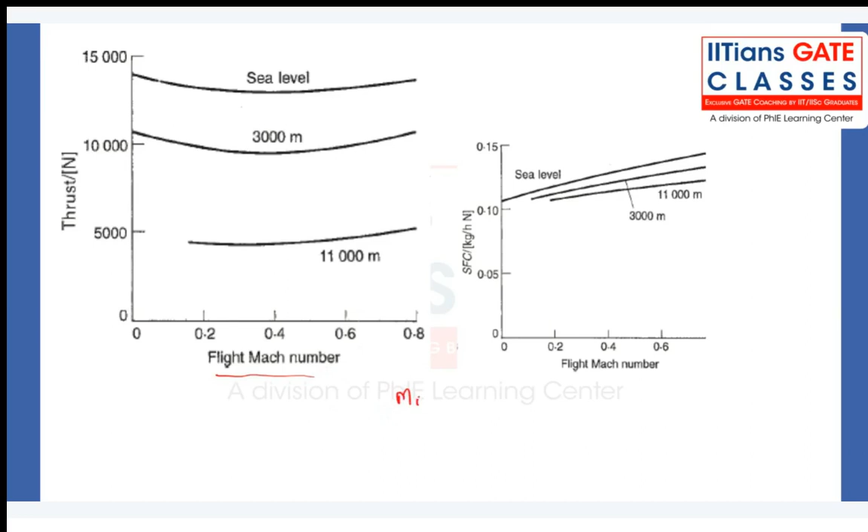The first question is how thrust actually varies with flight Mach number. Here, only the flight Mach number is given as a function, not the forward speed. The forward speed - how you define the Mach number at the inlet - is the forward speed of the aircraft divided by the speed of sound, local speed of sound, say gamma R Ti.

Taking gamma and R to be constant for air, as a calorically perfect gas within the troposphere altitude - we know the turbojet operates only within the troposphere, so that's safe to assume. So Ci is constant as per this problem statement, but how does temperature vary in the troposphere?

When you go from sea level to a higher altitude, how does temperature vary? It decreases, right? So Ti decreases as altitude increases. That makes the Mach number increase, right? If Ti is decreasing, that means Mach number is going to increase.

So that is the first outcome you get. How does Mach number vary? It increases. So now you see, as Mach number increases at any given altitude, how does the thrust vary? It almost decreases first and then increases, for a given altitude.

It's not for varying altitude, but the question is specific - for a given flight speed with increase in altitude. So we are not interested in a given altitude. For a given altitude, you could say the specific thrust first decreases then increases - that is true, but it's not for a given altitude, it is for different altitudes.

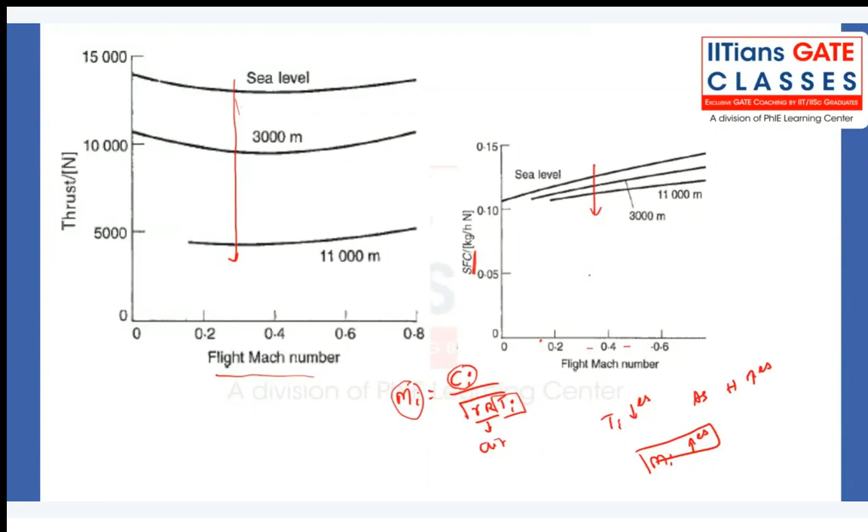So what we are going to do is define specific thrust. Specific fuel consumption can be defined as mass flow rate of fuel supplied to the thrust developed by the engine. We are again making one more assumption that thrust is optimum, so we are not having over-expansion or under-expansion. Given that the turbojet works only with a converging nozzle, we assume we are not going beyond optimum expansion, so the pressure thrust contribution is zero. That makes our life easier to comment on this problem.

Okay, so now this can be easily shown as fuel to air ratio divided by, sorry, this is SFC, specific fuel consumption, as is defined. So SFC can be written as F divided by Fs, where Fs is specific thrust.

So now, we are again assuming the mass flow rate of the fuel is not going to change, it is constant. But we know the thrust is actually going to decrease as we move with altitude.

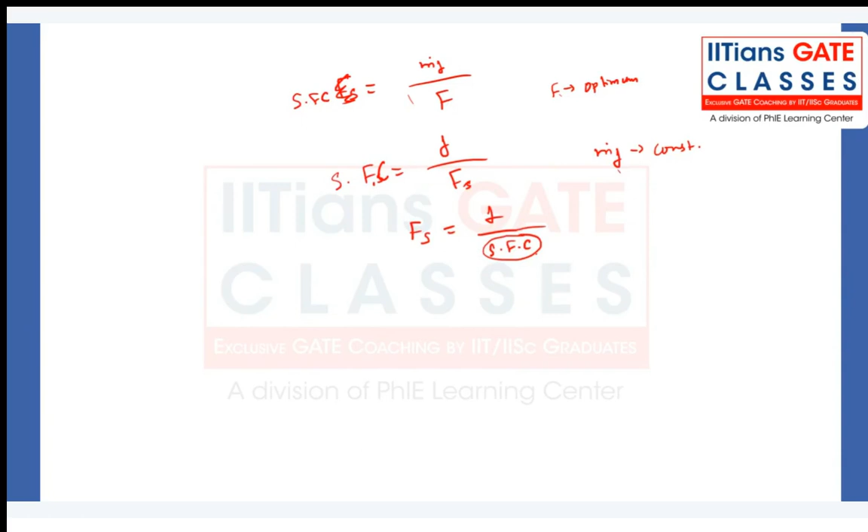But what about F? F is defined as mass flow rate of the fuel to mass flow rate of the air. We are assuming we are not changing the mass flow rate of fuel to the engine, so we take it to be constant. So now we have to look at the variable mass flow rate of air. How do we define the mass flow rate of air?

That is density, incoming air velocity Ci, or the forward speed, and the inlet area. We can calculate mass flow rate in this manner. In the problem it is given that it is constant, and also that it's the same turbojet engine, so I can safely take the inlet area to be constant. So the only parameter which varies is density.

As we move to higher altitude, how does the density change? Density decreases, right, as altitude increases. So if density is decreasing and the other two parameters are constant, then the mass flow rate of air is going to decrease as we move to higher altitude.

So if the mass flow rate of air is decreasing, that means the fuel to air ratio is increasing. So if fuel to air ratio is increasing and SFC is decreasing, what happens to specific thrust now? The net result is Fs is going to increase monotonically, right?

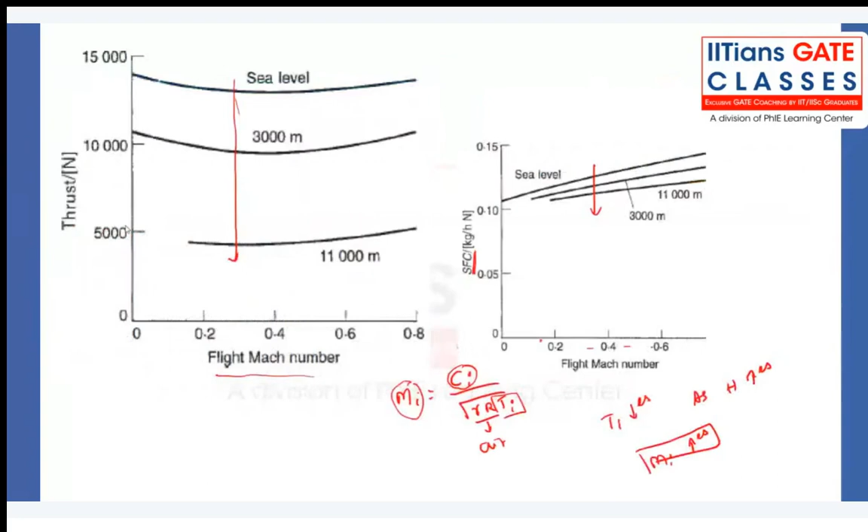Yeah, SFC is correct, right? It's mass flow rate of fuel to the thrust produced by the engine. I want to stress here, this is not defined for a unit thrust. Don't take this definition as being for unit thrust. No, it's the amount of fuel you are supplying to the amount of thrust you have produced, that's how you define it. It is not defined for a unit thrust, it is defined for the actual thrust and actual fuel you supply. So this has to be cleared, don't take that wrong message. It's not defined for unit thrust.

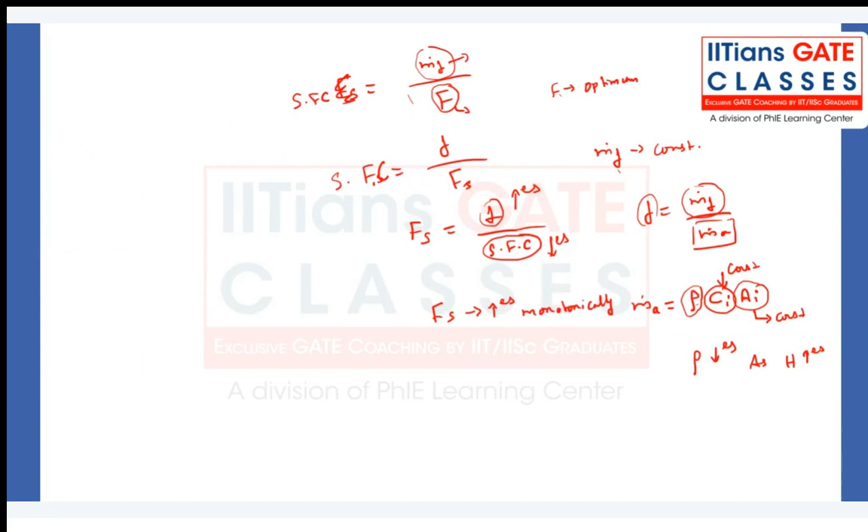No, okay, so then we will move on to the next question. Again, this is based on the optimization graph, so they really tested your understanding of the topic of optimization. We will see how the propulsion efficiency of a turbofan engine operating at a given Mach number and a given altitude changes with increase in compressor pressure ratio. It's a very beautiful question.

See, the major keyword we have to look here, what they are actually asking: the propulsive efficiency of a turbofan engine, operating at a given Mach number and a given altitude, change with increase in compressor pressure ratio. So if I increase the compressor pressure ratio, how does it change? There are 1, 2, 3, 4, 5 keywords. So as soon as you see this kind of question, you have to identify the keywords.

I'm taking an alternative route to answer this one. Though I could have taken the turbofan engine, the definition of propulsive efficiency becomes much more complicated for turbofan. So I'm reducing my problem definition from turbofan to turbojet. They both work in a similar fashion, and though the propulsive efficiency definition changes for turbofan engine, it's still a jet combined with a fan. I'm taking the turbojet engine because I want to see how the core engine part works with the given condition. If I can comment on that, then the bypass part can be easily taken - it mainly depends on the turbojet performance overall. So we will see it in that way.

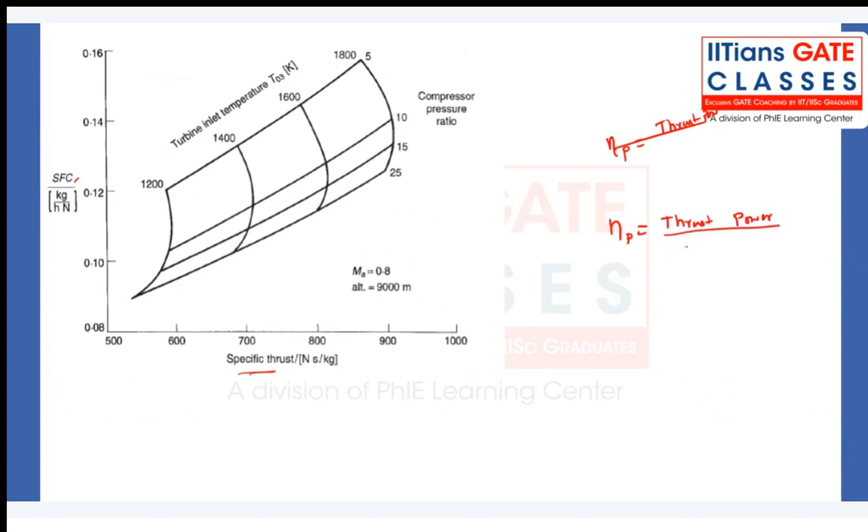Let me write it clearly. It is thrust power divided by the kinetic energy of the engine output. So I can write half m dot a, cj square minus ci square. Remember I am defining this for a turbojet engine, but we can still comment on this particular question with this approach.

Now the interesting part is, what is thrust power? Thrust power is nothing but thrust times the forward speed, divided by half m dot a, cj square minus ci square. So what is F divided by m dot a? That is nothing but specific thrust. So we get 2 times specific thrust times ci, divided by cj square minus ci square. So this is my propulsive efficiency. Let us keep this relation aside - we will come back to it later.

Now if you look at this graph, how does specific thrust vary? That's what we're going to address first. What are the constraints given in the question? They say operating at a given Mach number - they are fixing the Mach number and the altitude. So those two variables are fixed, and this graph is for a given Mach number and given altitude. So we've taken care of that part first - we are fixing the Mach number and flight altitude.

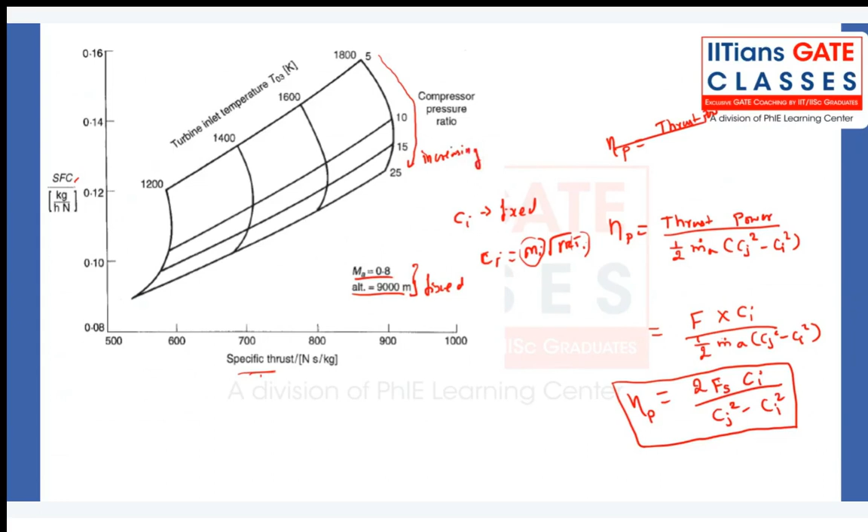Now, what they're asking - if I change the compressor pressure ratio - this is how the compressor pressure ratio is increasing, see it is increasing. But now look at this graph - it's not just the compressor pressure ratio as one of the variables, or the only variable. There are other variables too.

There is a turbine inlet temperature, there is a specific fuel consumption. No statement is given about these two variables - they are not specified whether fixed or changing. If I make an assumption that my specific fuel consumption doesn't vary, then I can draw a constant line.

So how does specific thrust vary now? See this point, this point, this point, and this point. So now clearly my compressor pressure ratio is increasing on a constant SFC line, and as it increases you will conclude that specific thrust is also increasing. But that is a wrong conclusion, because it is not given that SFC is constant. So I cannot make a statement just by using that.

And if you take turbine inlet temperature as fixed, then again you will see that my specific thrust is going to increase first and then decrease. So in that sense it also doesn't make sense, because this constraint is not given to you - you cannot assume turbine inlet temperature is constant. All you have to do is see how these variables actually vary. So first we will look at the specific fuel consumption, which can be defined as F divided by Fs.

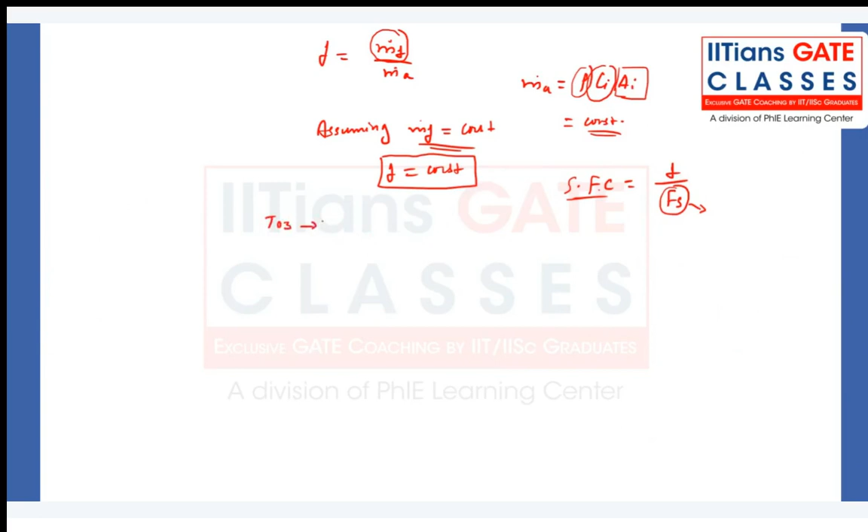So now we see how turbine inlet temperature T03 varies. This question we will address. So we addressed for F, now I am going to address for T03. How does it vary? If you remember our discussion on polytropic process, we can assume this compression process to be some kind of polytropic process. So say I have a given pressure ratio across the compressor.

So I can write for a change in temperature across the compressor as the pressure ratio to the power of gamma minus 1 divided by gamma, times eta infinity C. So again I am making one more assumption that the polytropic efficiency of the compression is constant for all pressure ratios whatever we are going to investigate. So this is another assumption I am actually making.

Keeping that in mind, if pressure ratio is increasing as per the given statement, T01 is not going to change because atmospheric condition is not going to change and I am not changing the inlet either. Ci is also not changing, so it is not going to change. So now how exactly does T02 vary? If pressure ratio increases in a compressor, what happens to T02? T02 increases, right, as pressure ratio of the compressor increases.

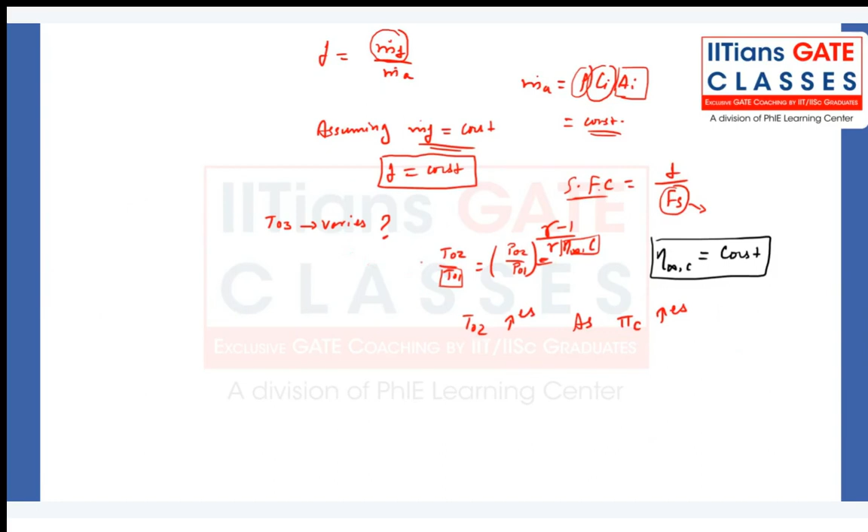So if T02 is increasing, now look at the combustion process. Mass flow rate of the fuel is not changing, and you are not changing the fuel either, the type of fuel. So I can write the energy balance within the combustion chamber. Let's put it like this: energy balance in the combustion chamber, I can write T03 equals T02 plus some terms which come with the mass flow rate of gas and Cp of gas and those terms. That is dividing over here.

And some here again, Cp of air divided by Cp of gas is there. All those terms I am not considering, I am treating them all as constants, they are not changing. So times I can get something like mass flow rate of fuel, or F, in terms of combustion efficiency times, or we will treat it as 100% efficiency, that is fine, QCV, right? So this part is not going to change, right? This we can treat as not a variable quantity for a given problem.

So the only thing which changes here is T02, and we saw that T02 increases for increasing pressure ratio. If T02 is increasing, what happens to T03? So it's addition of some constant, so T03 is also increasing, right? As per the given problem statement, T03 increases as compressor pressure ratio increases.

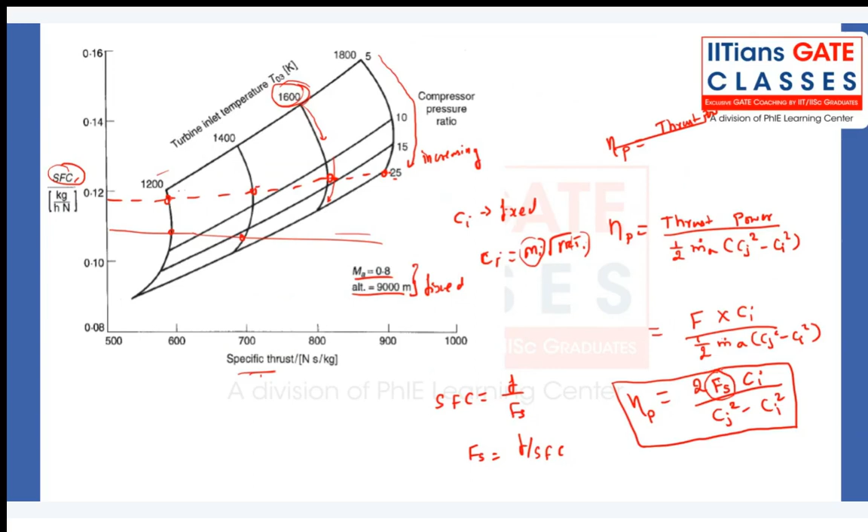So the best answer to this one is it decreases and then increases. So there is one possible answer which says both the options, decreasing and increasing nature. So this can be a better option among the given options. So everybody clear with this?

Yes. So these are very intriguing questions, and it needs a lot of thought process. In a GATE kind of environment, I would suggest keep these questions at the end. Don't try to answer in the first go, because this is a multiple choice question. You have a better probability that you might lose a mark if you haven't thought this question carefully. If you just pick something as a guess, you might lose marks by picking the wrong answer. So you have to think carefully to answer these questions. So keep these questions at the end. Though it's a 1 mark question or something like that, it looks very straightforward by reading the question, but it is not. So these kind of questions are tricky.

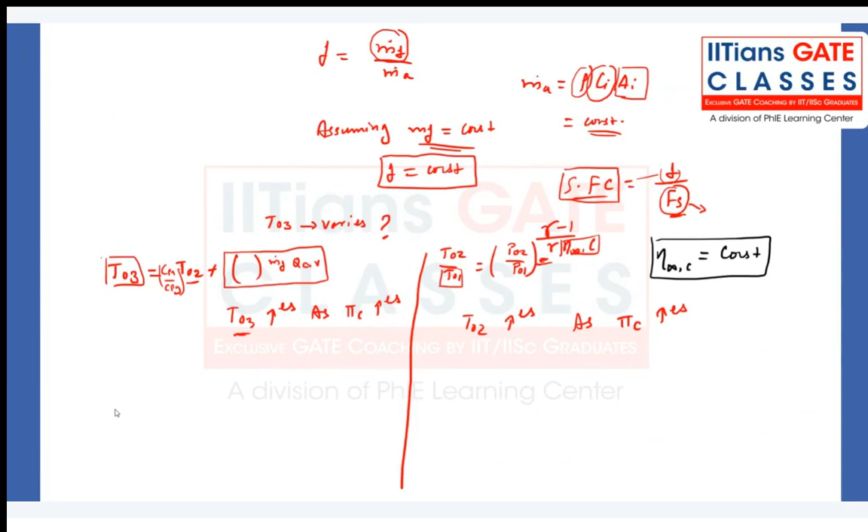The shape of a supersonic diffuser that slows down a supersonic flow to a subsonic flow is - it should be a very straightforward question. So you should have a supersonic diffuser that brings down the supersonic flow at the inlet to a subsonic flow at the outlet. So what should this shape be? It has to be converging and diverging, right? So we have this nice area Mach number relation that guides us, like dA by A is equal to M square minus 1 times du by u for 1D quasi one dimensional flow. So with that, we can comment on what should be the shape for a supersonic diffuser.

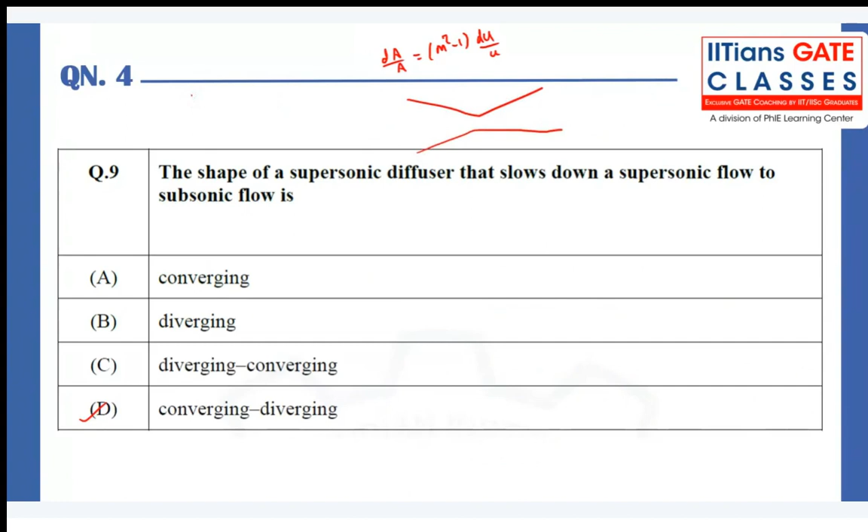And once it reaches the minimum area, we know the flow becomes choked. Then it has to still decrease to a subsonic value. So then you have to have a diverging area. So converging and diverging portion we need. There's a theoretical one. The practical diffusers would look something like this, with some constant area duct, the throat, like this. But in any way, it's a converging, diverging duct.

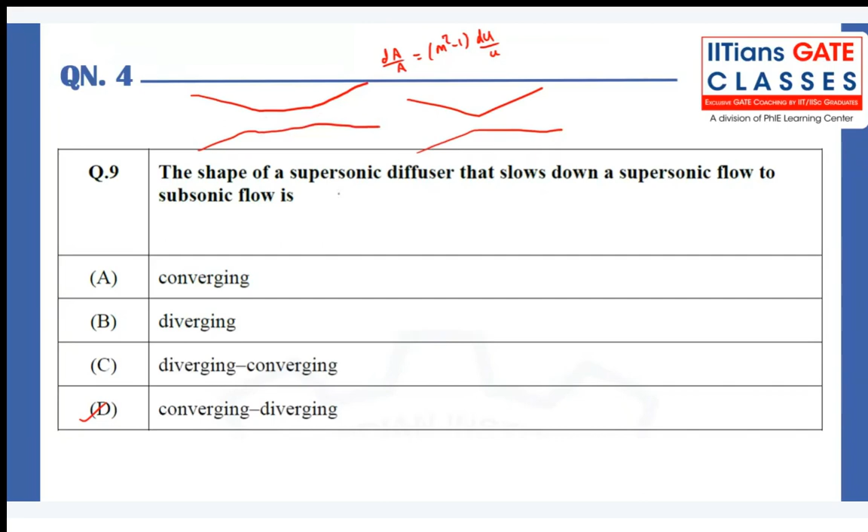Okay, so move to the next question.

An aircraft with a turbojet engine is flying at 270 meters per second. The enthalpy of the incoming air at the intake is 260 kilojoules per kg, and the enthalpy of the exhaust gases at the nozzle exit is 912 kilojoules per kg. The ratio of mass flow rates of the fuel and air is equal to 0.019. The chemical energy or the heating value of the fuel is 44.5 megajoules per kg, and the combustion process is ideal. The total loss of heat from the engine to the ambient is 25 kilojoule per kg of the air. The velocity of the exhaust jet is in meter per second.

So this question is really a beautiful question.

You might feel this is a very complicated question because so much information is given, and it looks like an entire cycle analysis question, because from inlet to outlet, heat addition and heat rejection, so much information is given. But you have to take a brief moment and read the question very carefully.

If you look at this question carefully, you will realize it is nothing but a simple control volume approach. Though it is related to a turbojet engine, you really don't have to dig deep into the individual components. You are not going to analyze the compressor, the turbine, the intake, the nozzle, or even the combustion chamber. You are not going to analyze any of the components of the turbojet engine.

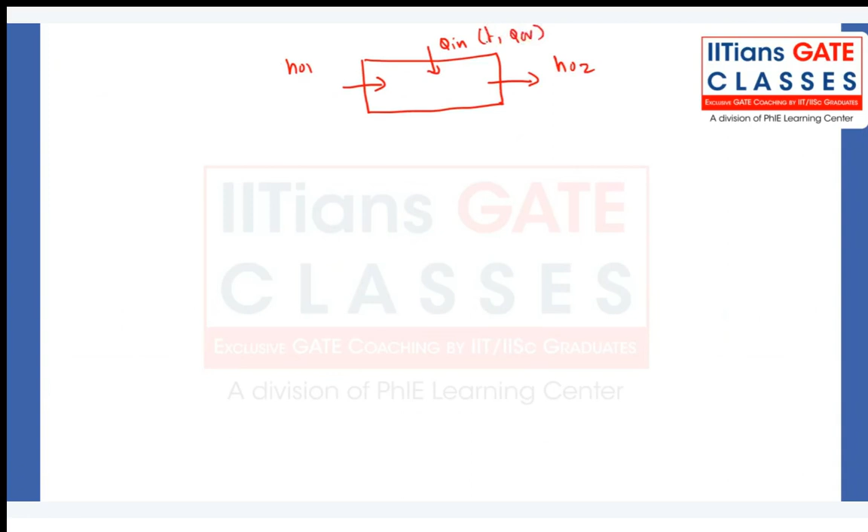So if I draw a simple control volume enclosing the entire turbojet, what do I have? What's coming in, what's going out, that's it. They give the enthalpy at the inlet and the enthalpy at the outlet, the heat addition — from this information you can easily calculate the heat addition. They give F and the calorific value of the fuel, so from here you can calculate Q in, and what is going out of the system, Q out. This simple model is sufficient to answer the question.

Now we will see how we can address this question. The incoming air velocity is also given, so the best approach here is to apply the steady flow energy equation — the first law applied to a flow process. We know that conservation of energy has to be maintained, so what does our first law of thermodynamics tell us?

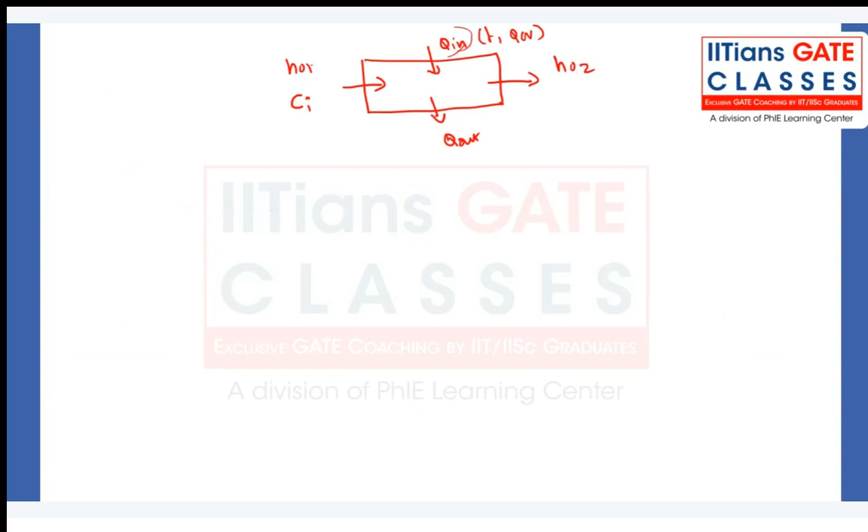If I apply conservation of energy, H1 is given, so you can calculate H01. H2 is also given, and you are asked to calculate the exhaust velocity of the nozzle. So conservation of energy says: delta Q is equal to the change in internal energy of the system plus the external work done.

If I apply that to a flow process, it can be shown that mass flow rate of air times h1, the specific enthalpy, plus mass flow rate of air times the kinetic energy at the inlet, Ci squared divided by 2, plus mass flow rate of the fuel times the heat addition — that is the energy being added in, with combustion efficiency if applicable — minus the heat which is going to be rejected, combine as the total heat change, delta Q, across the system boundary.

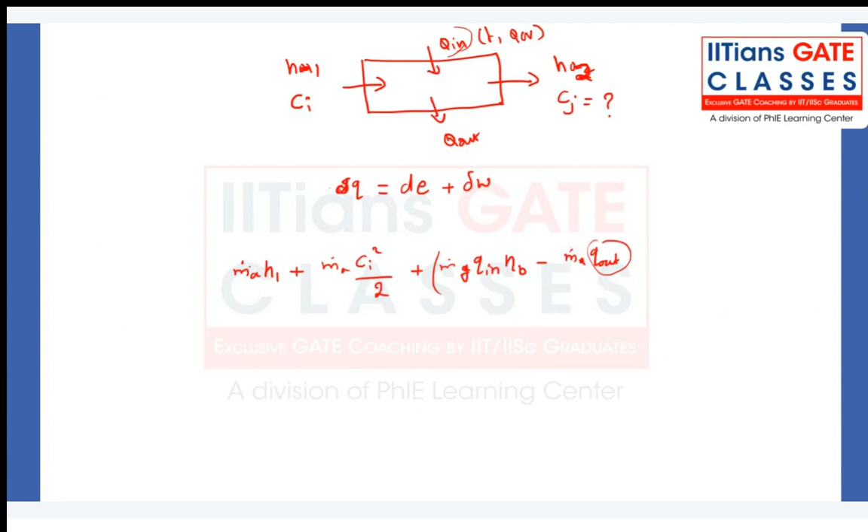So it is the mass flow rate of the air times Q out, because Q out is given in terms of per mass flow rate of air, so I am multiplying the mass flow rate of air to be consistent with the units. This is equal to the right hand side, that is the mass flow rate of the gas.

The moment you add the mass flow rate of fuel, continuity tells you the mass flow rate of gas should equal mass flow rate of air plus mass flow rate of fuel. There is addition of mass to the system, so we have to account for that. It is mass flow rate of gas times H2 plus mass flow rate of gas times Cj square divided by 2.

Plus, if there is some work transfer, any external work transfer. But for the given question, we don't have any external work transfer, so we can neglect this part to be 0. All we have is this part now.

If I take mass flow rate of air common here, it becomes 1 plus mass flow rate of fuel by mass flow rate of air, that is 1 plus F. So I can take mass flow rate of air common from the equation. That makes it 1 plus F times H2 plus Cj square divided by 2, on the right hand side.

The left hand side, again, if I take mass flow rate of air common, this is H1 plus Ci square divided by 2.

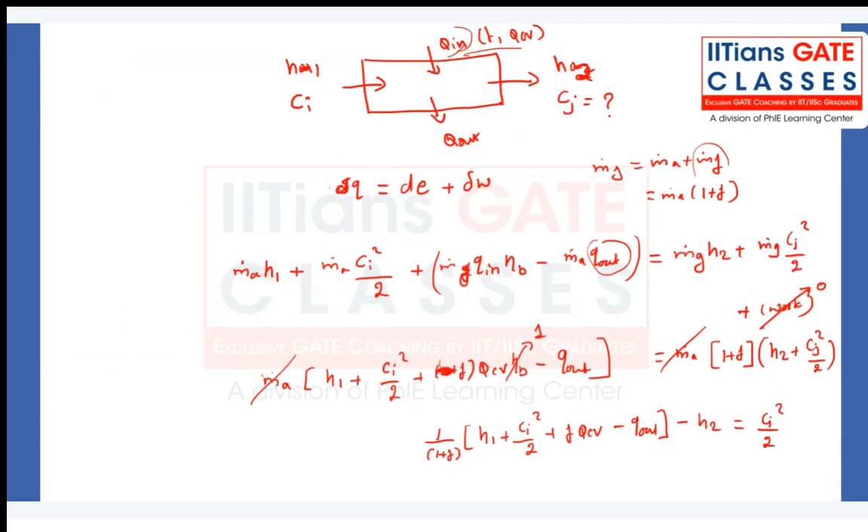Now multiply 2 to this side and take a square root. If you put all the numbers, you should get Cj equal to something around 606.834 meter per second. What is asked in the question, you have to keep it to 2 decimal places and round off. So rounding off to 2 decimal places, it becomes 606.83 meter per second. Clear?

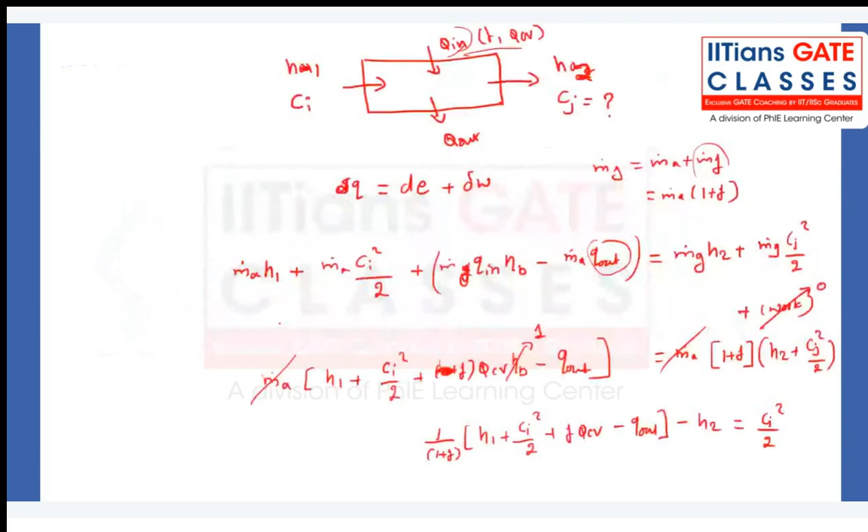Okay, so let us move on to the next question.

A twin spool turbofan engine is operated at sea level with given conditions. PA is equal to 1 bar, TA is 288 Kelvin. The engine has separate cold and hot nozzles. During the static thrust test at sea level, the overall mass flow rate of air through the engine and the cold exhaust temperature are measured to be 100 kg per second and 288 Kelvin respectively. The parameters for the engine are: fan pressure ratio 1.6, overall pressure ratio 20, bypass ratio 3.0, turbine entry temperature 1800 Kelvin. The specific heat at constant pressure Cp is 1005 joules per kg Kelvin, and the ratio of specific heats, gamma, is 1.4 for the air.

Assuming ideal fan and ideal expansion in the nozzle, the sea level static thrust from the cold nozzle is to be found, in kilonewtons, with the answer kept to 2 decimal places by rounding off.

Again, if you look at this question, it looks very lengthy because so much information is given, but you have to take a moment and read the question carefully, and carefully note what is asked. All they are asking is to calculate for the cold nozzle alone, so the moment you have to calculate for the cold nozzle alone, this other information is irrelevant, we don't really have to worry about that.

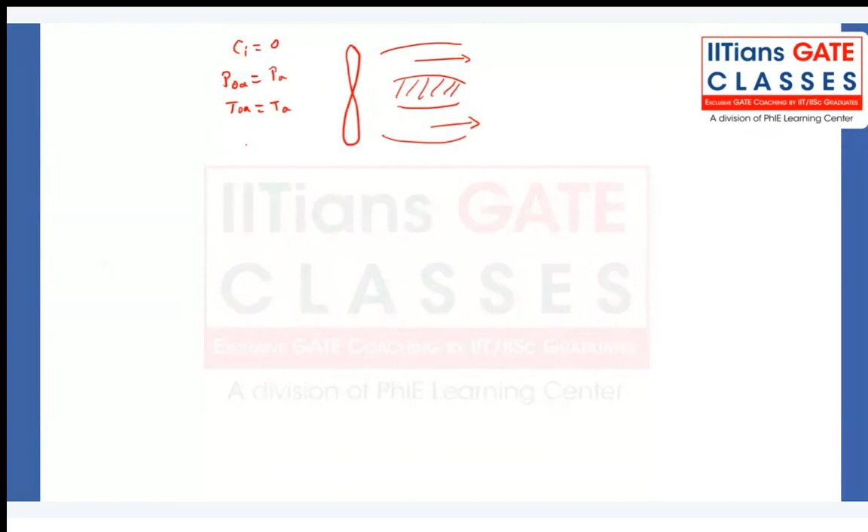So I have information here, PA. See here, my stagnation condition at the inlet is also equal to the static condition because Ci is 0. So I can easily take T naught A equal to TA, and P naught A equal to PA, assuming steady flow. It really doesn't matter because it's a stagnant condition anyhow.

And the mass flow rate of the air is 100 kg per second. From the bypass ratio, I can easily say that the mass flow rate of air can be written as the mass flow rate of air going into the bypass duct, or the cold nozzle, plus the mass flow rate of hot air which is going into the engine.

So from here I can use the definition of beta, the bypass ratio. How do we define bypass ratio? It is the mass flow rate of cold air to the mass flow rate of hot air. Using that, I can show that the mass flow rate of cold air can be written as beta times mass flow rate of air divided by beta plus 1. If you take the mass flow rate of cold air common, it becomes 1 plus 1 divided by beta.

Let me do that step. It becomes 1 plus mass flow rate of hot air by mass flow rate of cold air, that is 1 divided by beta. Keep this on the right hand side, so mass flow rate of cold air equals mass flow rate of air times... if you take it to the other side, it becomes 1 divided by 1 plus 1 by beta. Taking the LCM, it becomes beta plus 1 divided by beta. So beta goes to the other side, and it becomes beta times mass flow rate of air divided by 1 plus beta. That is what we have written here.

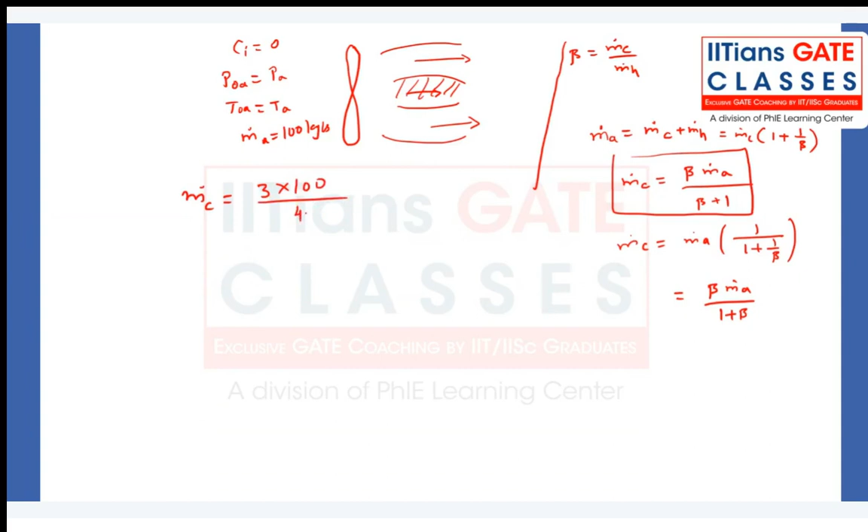So now to calculate P naught 1, if I say this stage is at the atmospheric condition, immediately after the fan this is state 1, and at the nozzle exit I will call it state 3. So now I have to calculate the information to know the thrust, because I have to calculate how the flow is expanding from what pressure to ambient condition.

So for that I want to calculate P naught 1. How can we calculate P naught 1? P naught 1 is nothing but fan pressure ratio times P naught A. Why? Because we don't have to worry about the efficiency of the fan now, since it's given it's working ideally, so I can easily calculate P naught 1 from the given information. So this is 1.6 times P naught A. P naught A is 1 bar. So it is going to be 1.6 bar. That is P naught 1. So this one we calculated.

Once I know P naught 1, how can I calculate T naught 1? T naught 1 can be calculated as T naught A times pi f to the power of gamma minus 1 by gamma, because it's an isentropic process, ideal fan. So T naught A is 288 Kelvin. So 288 times pi f is 1.6, gamma minus 1 that is 0.4 divided by 1.4. So this becomes 329.4 Kelvin. So we calculated T naught 1.

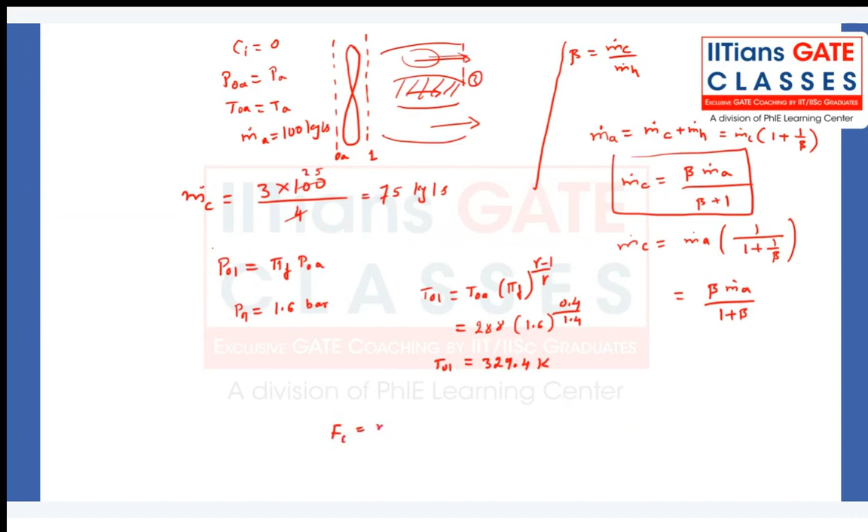So now to calculate the cold thrust, how can we calculate it? Cold thrust is nothing but mass flow rate of the cold air times the velocity at the cold nozzle, Cj, the jet exhaust velocity at the cold nozzle, minus mass flow rate of air times Ci. That we are really not worried about, because Ci itself is 0, so inlet momentum drag is nullified. So the only part we have to calculate is this one. And what assumption are we making? It is optimally expanding. So all we need to calculate now is this quantity, the cold exhaust jet velocity.

So now we will see how we can calculate that. I am again using the energy equation. Since the nozzle is ideal, T naught 1 is equal to T naught at the exit plane. That can be written as Te at the exit plane, plus Cj of the cold air at the exit plane of the nozzle divided by 2Cp. So I am using the energy balance. So from here I can write Cjc equal to square root of 2Cp times T naught E minus Te.

Actually you can directly calculate from here, because T naught E is equal to T naught 1 that you already calculated, and Te is already given in the problem. The nozzle exit plane temperature is given as 288 Kelvin. So you can directly use that, or you can do one more step: taking T naught out common, it becomes 1 minus Pe divided by P naught to the power of gamma minus 1 by gamma. This way also you can approach, since Pe is known. Assuming it is optimally expanding, Pe is equal to Pa. Pa is given in the problem as 1 bar, and P naught you calculated as 1.6 bar. So using either approach, you should get the cold nozzle exhaust velocity as 288.44 meters per second.

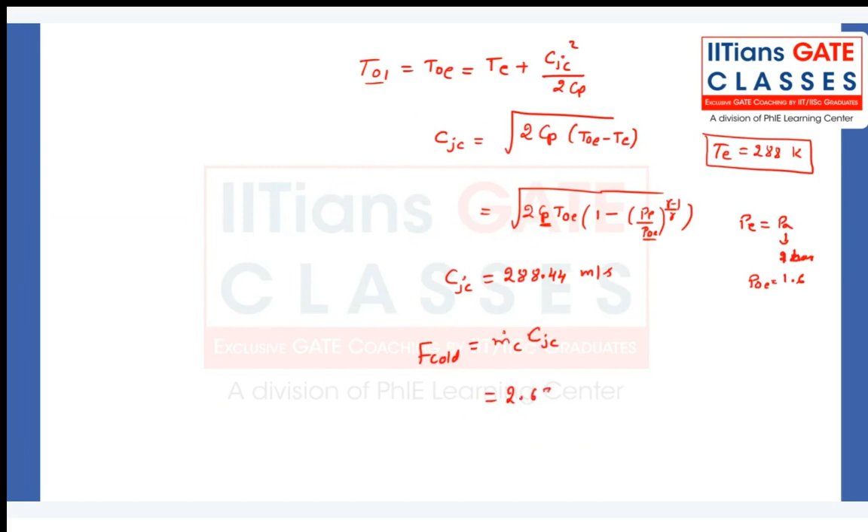Cp is given in the problem, so you can use that. So now you can calculate the cold thrust equal to m dot cold air, or bypass mass flow rate, times the jet exhaust velocity in the cold nozzle. It is going to be 21.633 kilonewton. So look at the question again - round off to 2 decimal places. So just keep 21.63 kilonewton. So clear?

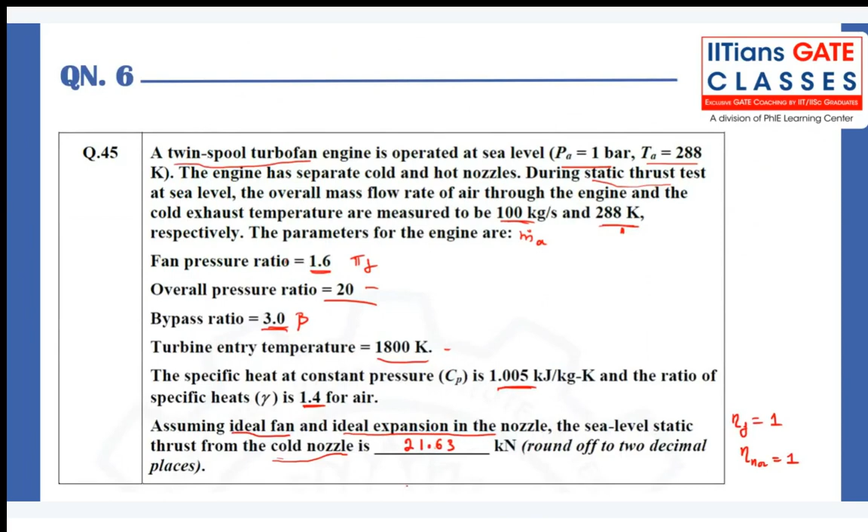Sir, can I go to the next page, sir? Just a minute. Yes. Sir, no, previous ones. Okay.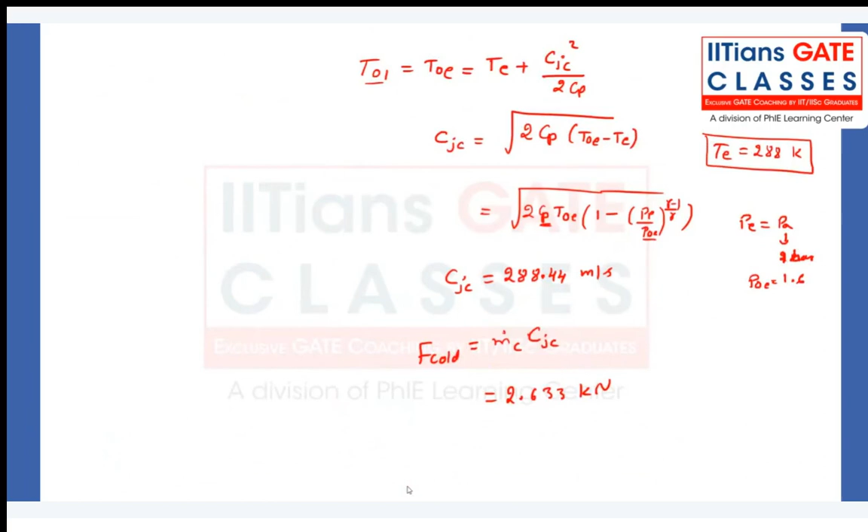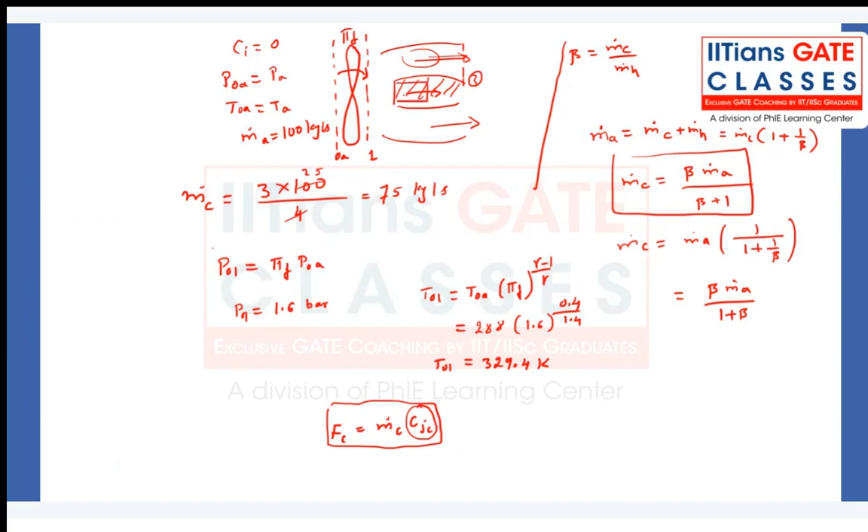Yes, Ashish. If an overall pressure ratio is given and the fan pressure ratio is given, the fan pressure ratio is the pressure rise which happens across the fan. The overall pressure ratio, whatever is given, that is for the compressor stages. You can have multiple stage compressors, so the overall compressor pressure ratio is called the overall pressure ratio, sometimes OPR. That is how they will mention it.

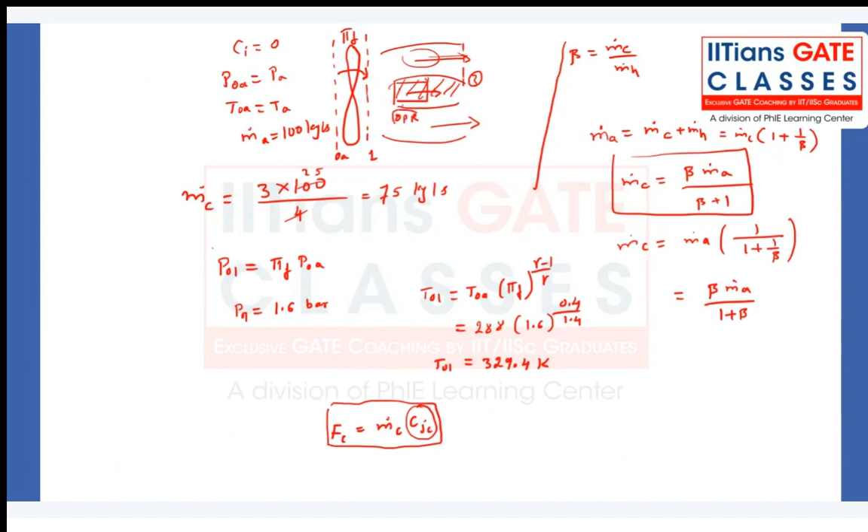So if you want to calculate the work done by the fan, you only have to use the fan pressure ratio, not the overall pressure ratio. If you want to calculate work done by the compressor alone, then you use only the overall pressure ratio, don't include the fan one. If you want to calculate the overall work delivered by the turbine, then you will add both, in case the turbine is running both.

If it is a twin spool configuration as stated in the problem, then you match the work done appropriately. Whichever turbine is running the compressor, you match that part, and the other part of the turbine which is running the fan, you match that one. So that can also be done. You have to do the matching appropriately.

And why do you have to divide the overall pressure ratio by the fan pressure ratio? It has nothing to do with that. Don't confuse it with that.

When you do this dividing of pressure ratios, when you have identical stages of compressors, and the overall pressure ratio is given to you, then to calculate the individual stage pressure ratio you have this idea of dividing them. We discussed this in class: if I have the overall pressure ratio given to me, that is nothing but P naught of the nth stage to P naught of the first stage. So I can write P naught n divided by P naught n minus 1, multiplied with P naught n minus 1 divided by P naught n minus 2, multiplied up to P naught 2 divided by P naught 1, which is the first stage. That's how you can build it up.

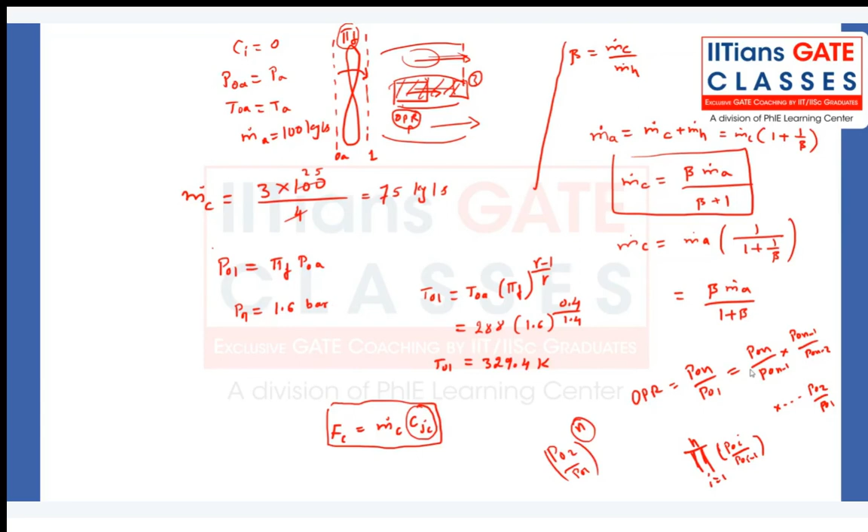Okay, let us move on to the next question.

At the design conditions, the velocity triangles at the mean radius of a single stage axial compressor is such that the blade angle at the rotor exit... Yes, Harini, you raised your hand, do you have any question?

So at the design conditions, the velocity triangle at the mean radius of a single stage axial compressor is such that the blade angle at the rotor exit is equal to 30 degrees. The absolute velocities at the rotor inlet and exit are equal to 140 meter per second and 240 meter per second respectively. The flow velocities relative to the rotor at the inlet and exit of the rotor are equal to 240 meter per second and 140 meter per second respectively. The blade speed u at the mean radius of the rotor is...

Again, the statements are lengthy but the problem is simpler. So you see here, what they have given is the 50% reaction stage triangle. They are given at the mean radius, so that's the first condition we satisfied.

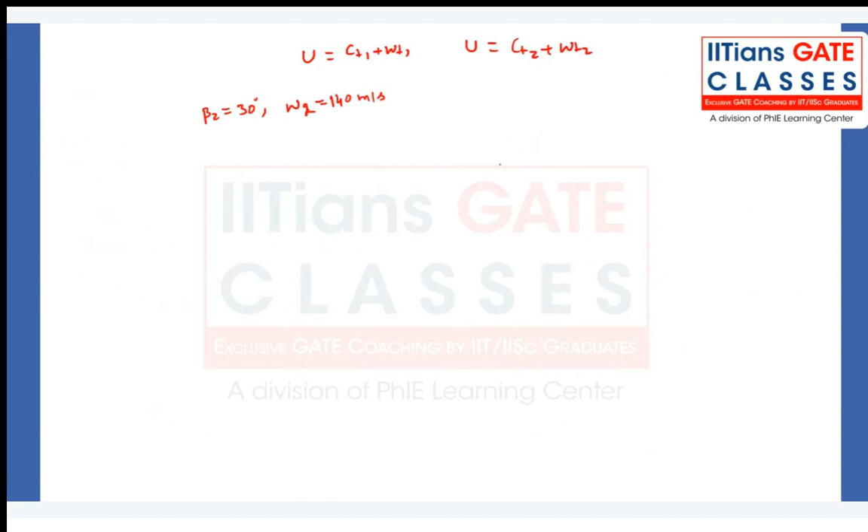If I use this information, for that velocity triangle alone, I have CA, I have W2, I have WT2, so I have beta 2. So from here, if I define cos beta 2, that is CA divided by W2. If I define tan, that is WT2 divided by CA. Or if I define sine, that is WT2 divided by W2. So from here I can calculate CA, I can also calculate WT2 from the given information.

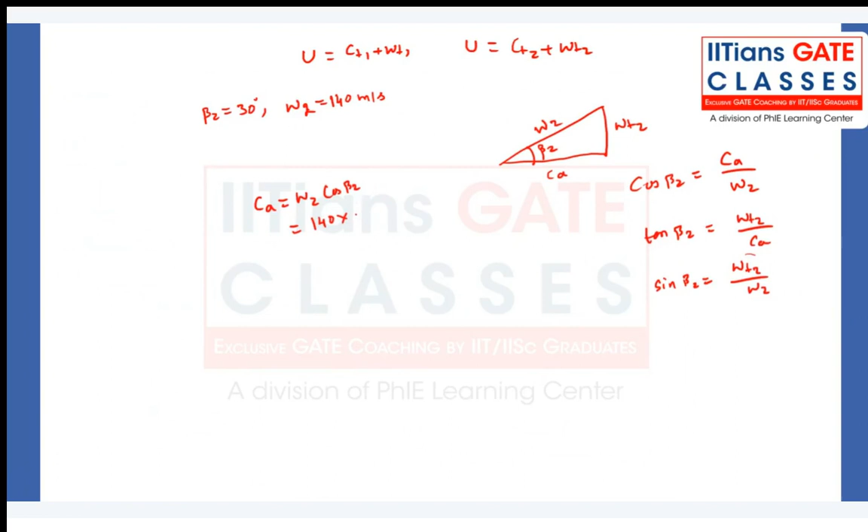So if I use this relation, CA is going to be W2 cos beta 2. So I get CA is equal to 140 into cos 30. Cos 30 is root 3 by 2. And if I again use the relation from here, WT2 is equal to W2 sine beta 2, that is 140 into sine 30 which is 1 by 2. So it is going to be 70 meter per second. So I got WT2, I got CA.

So now either I have to calculate what is CT2, then my job is done. I can easily add these two to get U. So now how can I calculate CT2? If I look at the other part of the triangle, let me use a different color. So the other part of the triangle is C2, CA, CT2.

So I have CA, I have CT2, I have C2, and this unknown is alpha 2. Now you see, I know what CA is. But alpha 2 I don't know. But I can calculate alpha 2 because I know what C2 is. So if I define cos alpha 2 from this triangle, that is CA divided by C2. So from here I can calculate alpha 2. CA is this one, 140 times root 3 by 2.

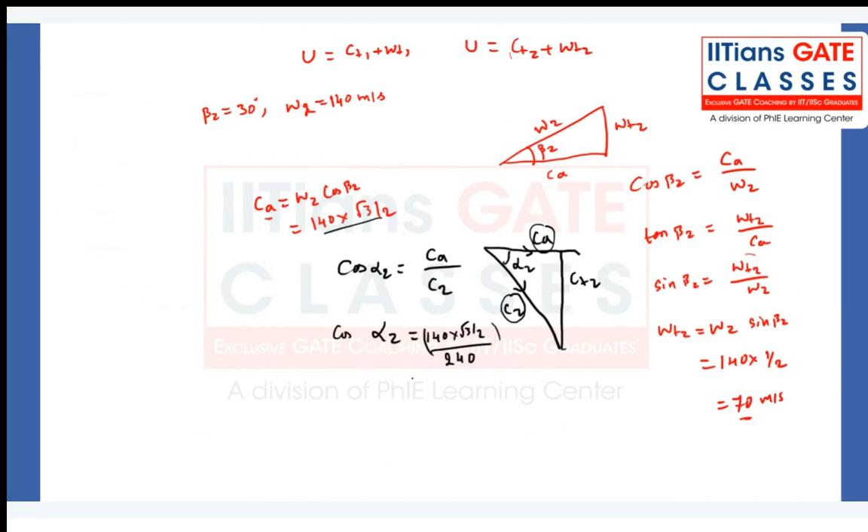C2 is going to be 240. So if I use that, cos of alpha 2 - take the cos inverse - you get alpha 2 to be equal to nearly 60 degrees, that is 59.66 degrees. So once I know alpha 2, now I can calculate CT2.

So what is CT2? Or you can also use the Pythagorean triplet. You know CA, you know C2, you can easily calculate CT2 using Pythagorean triplets. So CT2 is going to be C2 sine alpha 2. Use that, you get CT2 to be equal to 207.123 meter per second. So this is one approach, or else you can also calculate CT2 as square root of C2 square minus CA square. That is also possible. You should be able to get the same answer.

So now both CT2 is known, WT2 is known. So add these two.

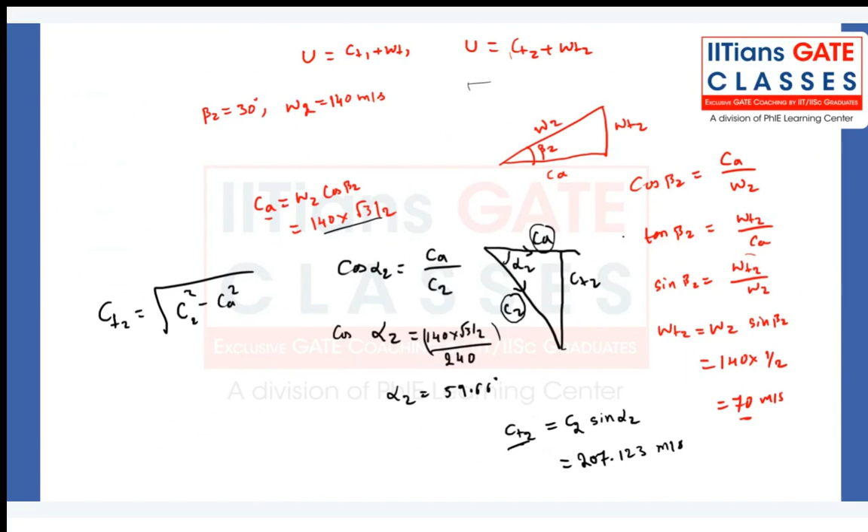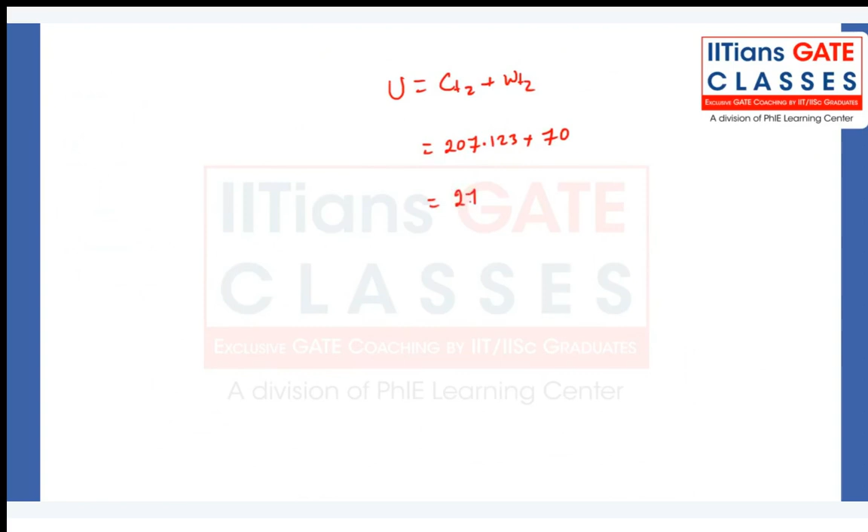So U is equal to CT2 plus WT2. So this is going to be 207.123 plus 70, which is going to be 277.123 meter per second.

And look at the question again, they ask you to put it in two decimal places by rounding off. So it is going to be 277.12 meter per second. Clear?

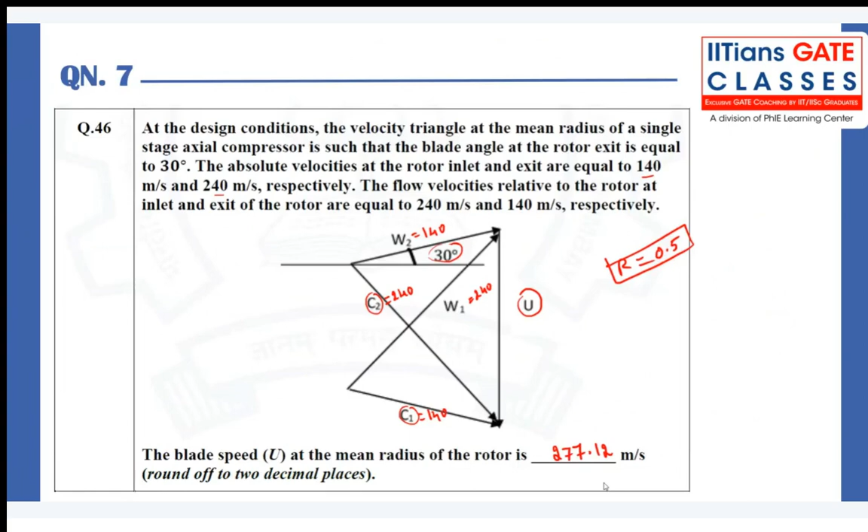Okay, so now move on to the last question from GATE 2021 on the propulsion topic. A single stage axial turbine has a mean blade speed of 340 meter per second at the design condition, with blade angles at inlet and exit of the rotor being 21 degrees and 55 degrees respectively.

The degree of reaction at the mean radius of the rotor is equal to 0.4. The annulus area at the rotor inlet is 0.08 meter square, and density of the gas at the rotor inlet is 0.9 kg per meter cube.

The flow rate through the turbine at these conditions is, again in kgs per second, round off to two decimal places.

So this question is straightforward in a sense that all we have to understand is how do we calculate the mass flow rate, because they are asking you to calculate the flow rate. So how do we calculate the mass flow rate?

So if you look at the Reynolds transport theorem carefully, for any arbitrary volume, if there is a surface through which a flux is going out, with the surface normal given to be n vector, and some flux is going out, say velocity vector, the flux is always going to be calculated with these vectors having some angle theta.

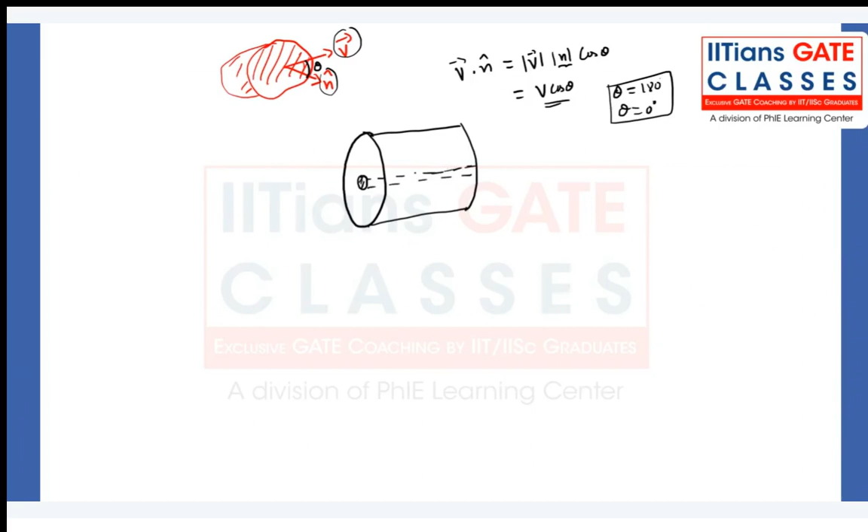Now if you look at the axial flow turbine or compressor, whatever, I have a stage like this. I'm simplifying the problem. So I have a shaft which is running, which is rotating, connected to a set of blades.

So flow is entering at any angle with velocity vector C, the absolute velocity vector, but the area is always pointing normal, the area normal vector. If you look at this, it is at an angle theta. If you call the air angle alpha, I have a unit normal in this direction and flow velocity coming in this direction with angle alpha. So then what is the projection of C onto this vector?

That is going to be C dot n. That velocity vector is nothing but the axial component of velocity, that is part of the vector, C cos alpha.

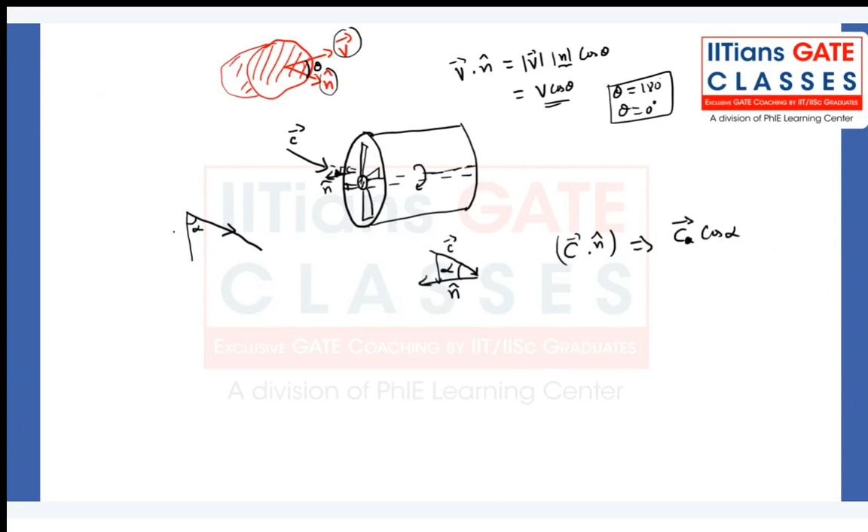So if you look at the velocity triangle carefully, you have C and you have alpha. So then what is the cosine of this angle? So this is unknown, you have C, so what is the cosine of this angle? Cos alpha is nothing but this unknown divided by C.

So that is going to be C cos alpha, which is nothing but that unknown we call the axial velocity vector for axial flow machines. This is the velocity component I have to consider for calculation of mass flow rate, because mass flow rate is the flux going in or out of the control volume or through the control surface, so that is the component of velocity we have to consider. Now we are clear with what velocity component we are interested in calculating.

So now if I want to calculate mass flow rate, that is going to be density times the component of velocity we are interested in, CA, times the annulus area. So if I want to calculate the area through which the mass is going in or going out, the flux, that area value is nothing but the annulus through which the flow is entering.

So if I look at the stage from a front view, this is again the shaft. Say this is D2 and this is the diameter 1. So the area through which mass is going is going to be pi times d2 square minus d1 square, divided by 4. This is the area.

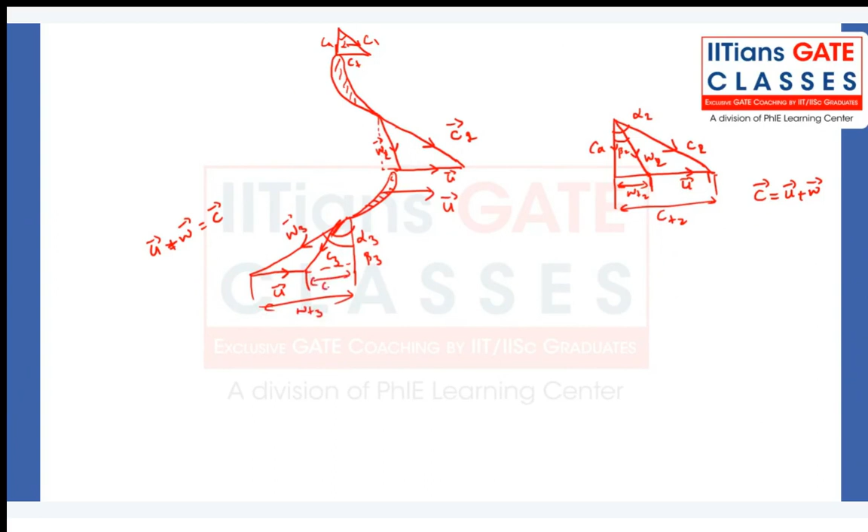So now my alpha 3 is this one, beta 3 is this one. So now if I look at, this is my WT3 component, this is my CT3 component. If you look carefully, U is nothing but WT3 minus CT3 here, whereas for the inlet velocity triangle, U is nothing but CT2 minus WT2.

So these are some parts you can analyze, but for the given problem we only need to calculate CA. For that we really don't have to look into all the trigonometric information about the triangle, since the question asked. So I'm just refreshing what are the things we can see, but for the given problem, all we are interested in is calculating the CA.

So the degree of reaction is given to us in the problem. That can be written as phi by 2 times tan of beta 3 minus tan of beta 2. In the problem, everything is given: beta 3 is given, beta 2 is given, U is given, CA is unknown and you have to calculate it, but R is given. The flow coefficient phi is nothing but CA by U. So I'm just substituting, that becomes 2R is equal to CA by U times tan beta 3 minus tan beta 2.

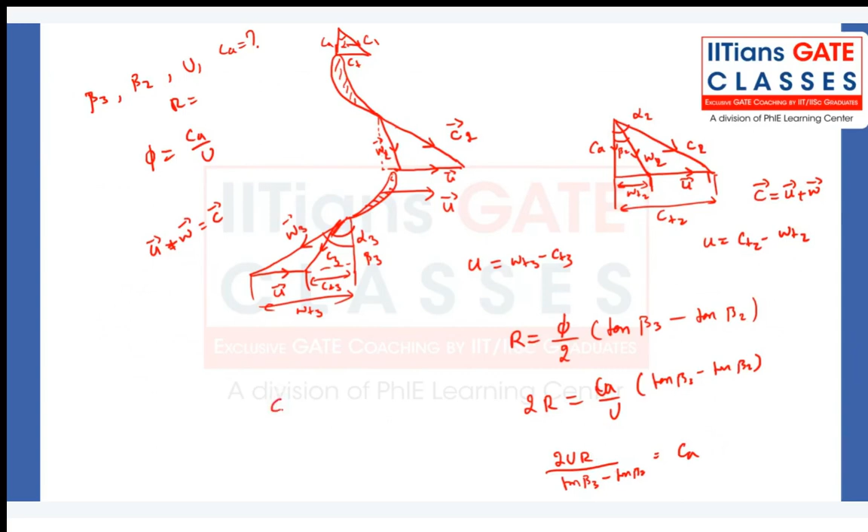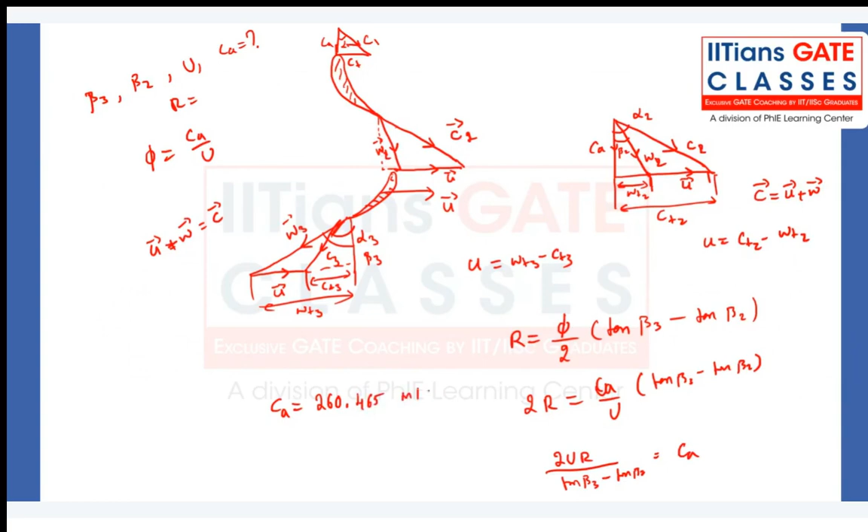CA is equal to 260.465 meter per second. So you keep that back into the mass flow rate here.

So you should be able to get mass flow rate is something around 18.75 kg per second. So how it is asked? Round off to 2 decimal places. So 18.75 kg per second. Clear, right?

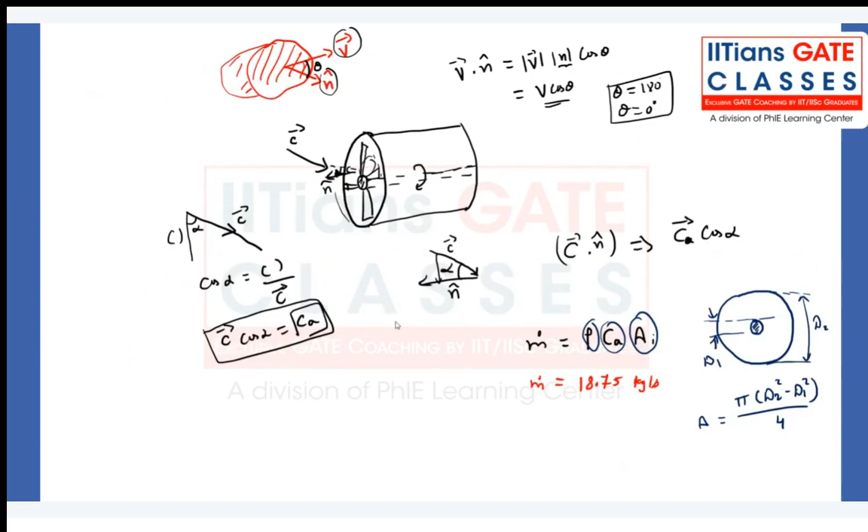Yes, so now we'll move on to the final question. This is again an interesting question.

Airflow rate through the gas generator of a turboprop engine is 100 kgs per second. Stagnation temperature at the inlet and exit of the combustor are 600 Kelvin and 1200 Kelvin respectively.

Satish, you have any questions? You raised your hand. Okay.

The burner efficiency is 90% and the heating value of the fuel is 40 megajoules per kg. The specific heats at constant pressure CP for air and burn gases are 1000 joules per kg Kelvin and 1200 joules per kg Kelvin respectively.

The flow rate of the fuel being used is what? That's the question in kgs per second, rounding off to 2 decimal places, and they specifically stress out that do not neglect the fuel rate with respect to the air flow rate. So they are asking don't neglect fuel to air ratio.

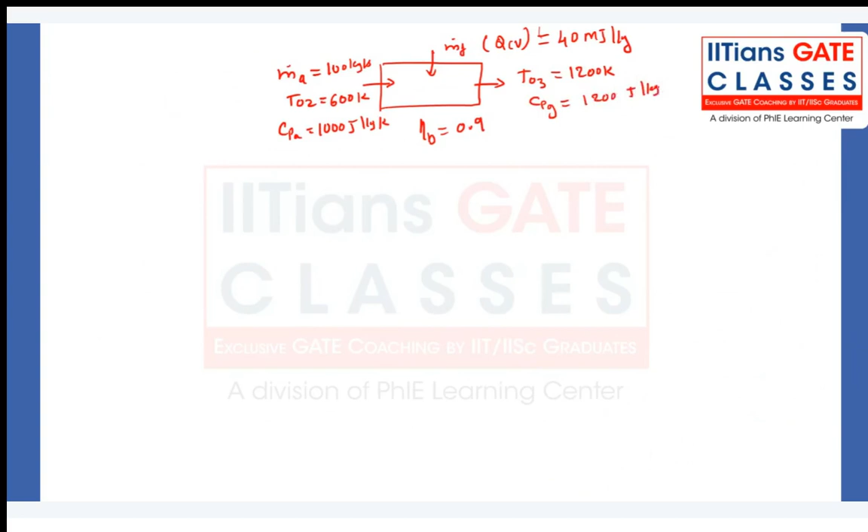It rises to a temperature of 1200. So the gas has the property 1200 joules per kg Kelvin, specific heat of the gas at constant pressure. Mass flow rate of the fuel, which is unknown, we have to calculate what we are supplying here, right?

So this is the simplified version of the problem. It's a control volume. So we know we can do an energy balance over here, steady flow energy equation. So since there is no work being added, or work is being done on the system or by the system, we can safely say work done is absent.

So that makes our energy equation simply: internal energy change is going to result from heat addition here. So we can equally write it is going to raise the enthalpy of the system. That's what happens here.

So total enthalpy at the exit of the system is nothing but total enthalpy at the beginning of the combustion operation, which enters the system, plus the energy we are adding to change the internal energy of the system. So that's what we are doing here.

So now we are also neglecting the velocities which are coming in or going out. We are treating it as fairly low speed, so we can neglect the effect of velocity change. So now it is going to be mass flow rate of gas times Cp of gas.

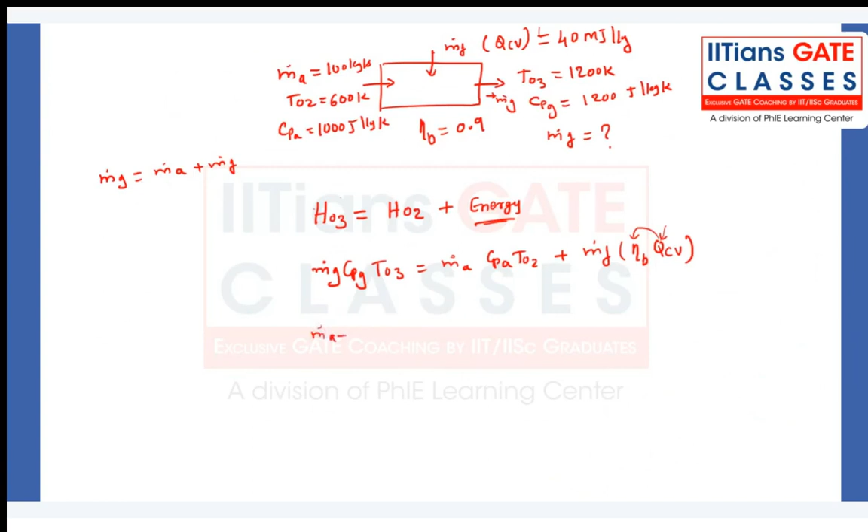So I can write mass of the gas as mass of the air plus mass of the fuel, times Cp of gas times T03, which is equal to mass flow rate of air times Cp of air times T02 plus mass flow rate of fuel times eta B times QCV. Now if I take mass flow rate of air common, that becomes 1 plus F.

What is F? F is mass flow rate of fuel divided by mass flow rate of air, times Cp of gas times T03, equal to mass flow rate of air times Cp of air times T02 plus again mass flow rate of fuel to mass flow rate of air, that is going to be F times eta B times QCV.

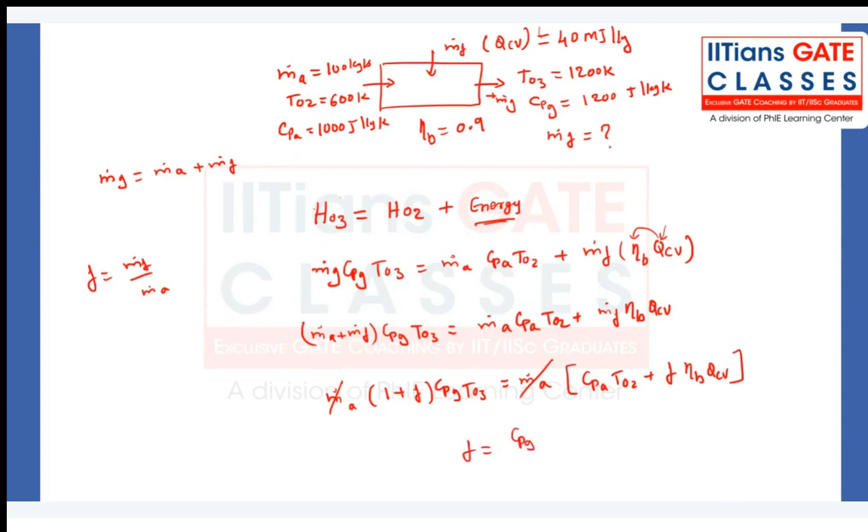So I can cancel this and this from both sides. Now you write it just for F. So if you write it for just F, that is going to be Cp of gas T03 minus Cp of air times T02, divided by eta B times QCV minus Cp of gas times T03.

So now you can calculate what is F, because everything else is given to us.

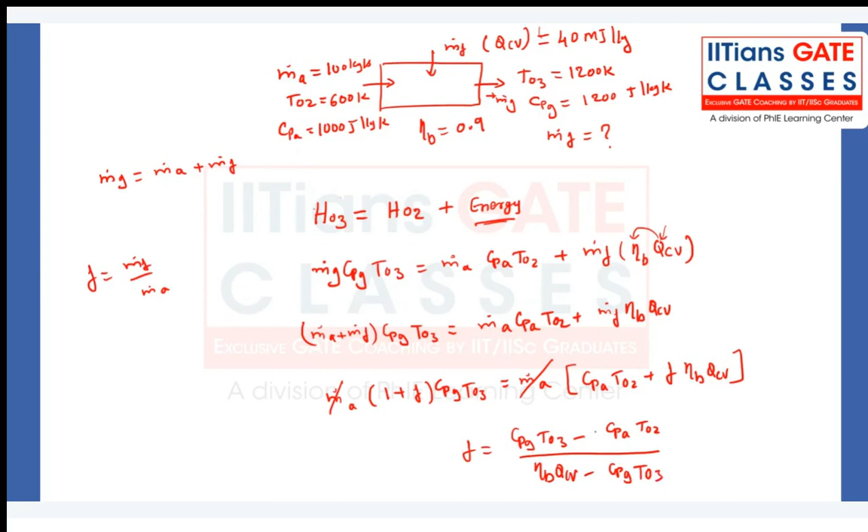So you can write F as mass flow rate of fuel by mass flow rate of air, which is equal to Cp of gas T03, that is 1200 into 1200, this is joules per kg Kelvin, this is Kelvin, it is going to be joules per kg, minus Cp of air is 1000 times T02 is 600, again joules per kg Kelvin. The Kelvin gets cancelled, it remains in joules per kg.

So again, 0.9 has no unit, it has unit 40 times megajoules, 10 to the power 6 joules per kg. It's already in the consistent unit what we are getting here, and this one 1200 times 1200.

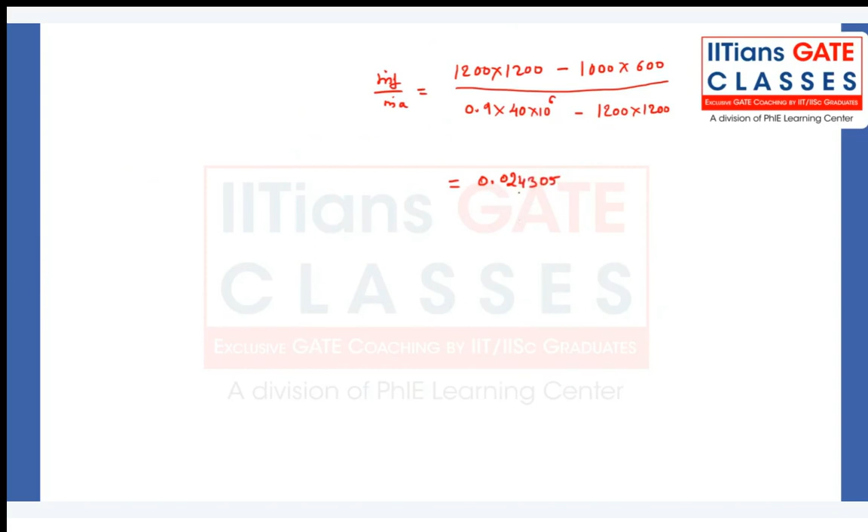So now you will get the fuel to air ratio as 0.024305. I am just keeping many digits, you can just keep up to the third digit, it is fine. So that is equal to mass flow rate of fuel divided by mass flow rate of air. Mass flow rate of air is already given in the problem, that is 100 kgs per second, so you multiply that: 0.024305 into 100, so that is going to be 2.4305 kgs per second of fuel flow rate.

Now look back at the question. They asked you to keep two decimal places by rounding off, so it is going to be 2.43 kgs per second. It's fine.

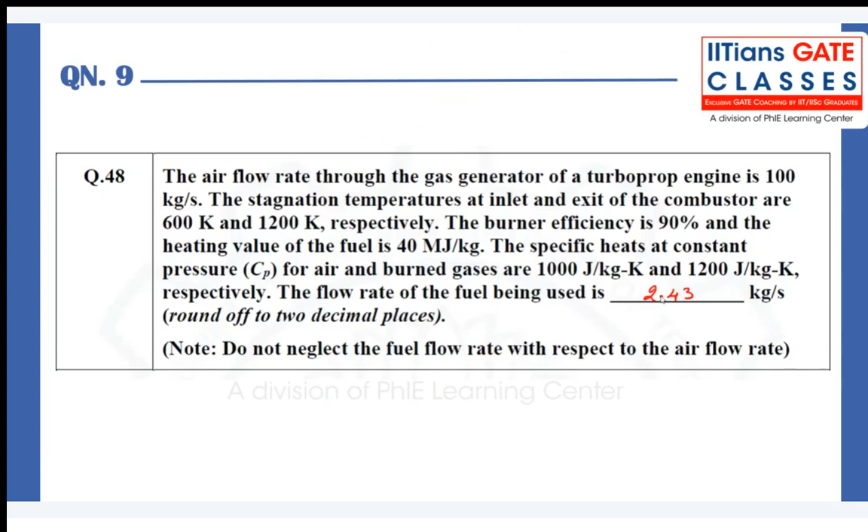So everybody clear, right? Yes. So that ends our discussion on GATE propulsion questions from the 2021 paper. You guys have any doubt?

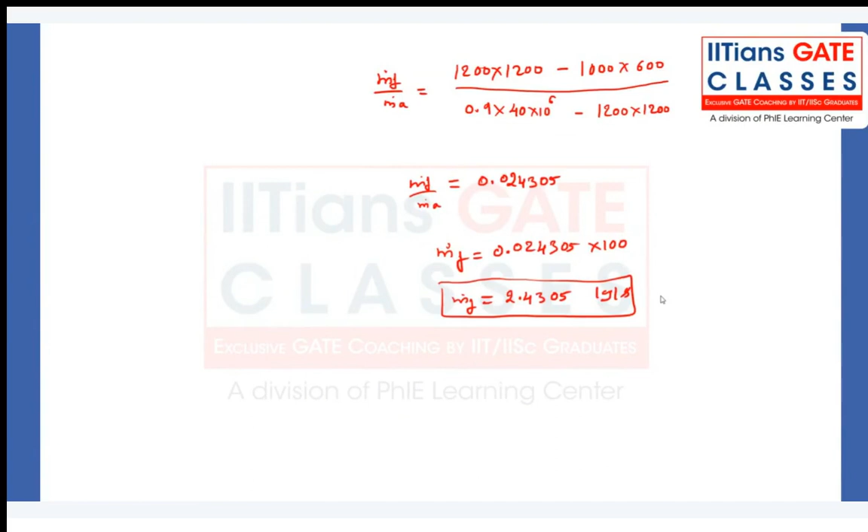I can take area ratio and optimum area ratio, what is the difference and how. Okay, this is slightly a different aspect from what we are discussing here, but still I can take it. So Vasant is asking a doubt on area ratio and optimum area ratio and what is the difference, and how it relates to under expanded or over expanded.

So see, this question has to be specific. I am assuming your question is from the CD nozzle perspective, because if you are considering only a convergent nozzle, then the over expanded and under expanded conditions will not be there. There will be only two conditions: either it is optimum expanded or it's going to be under expanded. So that is for a convergent nozzle.

For the convergent divergent nozzle, all these three conditions can be possible. So take any CD nozzle: I have a throat area AT and I have an exit area AE. This area ratio, the ratio of AE divided by AT, is a parameter called epsilon or something like that, called area ratio. Now based on this area ratio, whether it is greater than the design condition or less than the design condition, we can say whether the nozzle is operating in an over expanded way or under expanded way.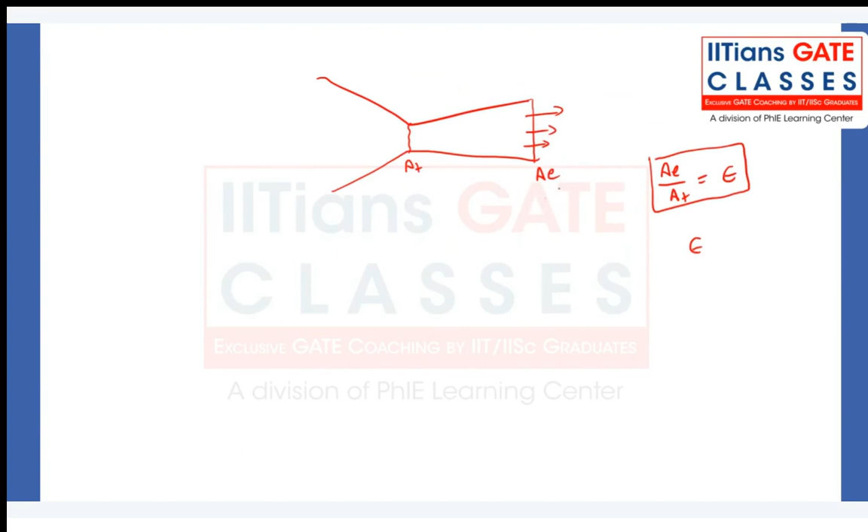Optimum area ratio is that area ratio for which flow is expanding optimally. So when epsilon matches with the optimum expansion, then that area ratio you call it as optimum area ratio. Now you compare with that optimum area ratio. Optimum area ratio is what you want to design, so that is the desirable design condition.

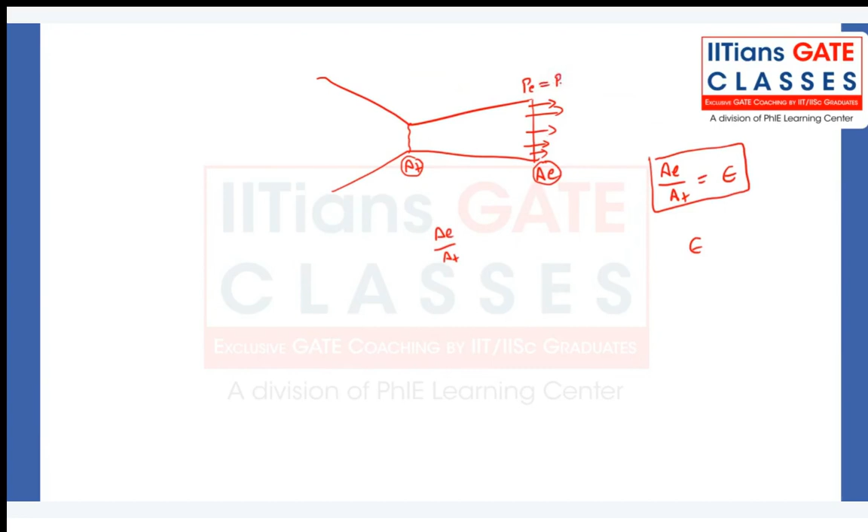So now you compare for a certain area ratio, you have an optimum flow. Say that is your reference now. Now you see what happens if I decrease my area ratio from that optimum condition. So you have some exit pressure which is matching with your ambient pressure or the back pressure, so that is an optimum area ratio. So I call it as epsilon opt.

So now you decrease your area ratio less than that optimum area ratio. Still you have the same back pressure, but your exit plane pressure is not going to be same because you changed your nozzle geometry. The expansion is different, right?

Yes. So now you can have another condition, that is if area ratio is greater, like you increased your area ratio than the optimum area ratio. So now you have to see from the gas dynamic perspective, keeping the throat area same, you are just increasing or decreasing the exit area. So for this condition, you are decreasing the exit area from the optimum condition. For this one, you are increasing the exit area from the optimum condition.

So keeping all other variables, P naught, T naught, whatever it is there at the upstream, you are not changing. So you are only changing this area ratio, you are not changing the throat area first, so you are just fixing that one. So now your flow is going to be choked for certain P0 and T0 and for a given area of the throat. So it is always going to be choked. That is your first assumption you are making to proceed.

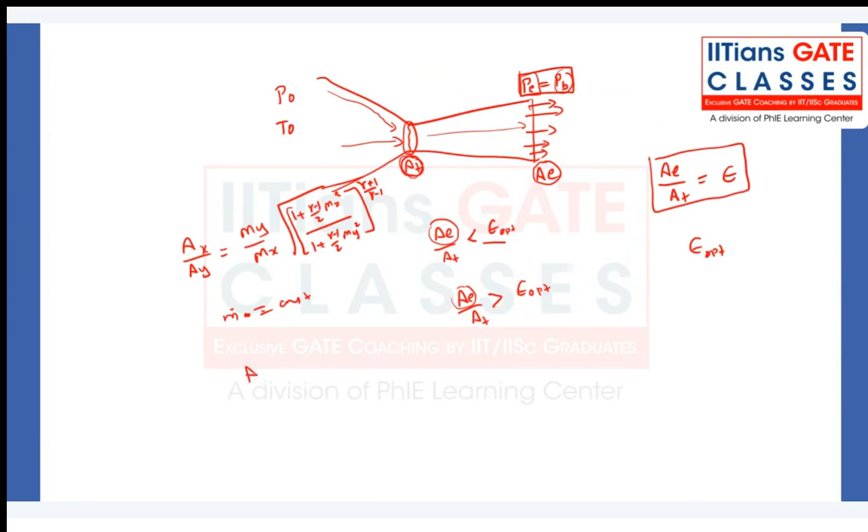This relation you can easily show from mass flow balance, since mass flow rate is constant. So from there, put one of these areas to be the throat, so that's AE divided by AT. Replace Y by throat, so My is going to be 1 because at the throat you are seeing choked condition, and it is going to be exit plane Mach number times 1 plus gamma minus 1 by 2 times Me square divided by, at the throat it is gamma plus 1 divided by 2, whole to the power of gamma plus 1 divided by gamma minus 1.

So now from here you can calculate what will be your Mach number. This is a bit complicated process because it's not a straightforward relation, but still you can get what would be your Mach number if you change the area ratio. From here you can actually see whether you are going to get an increased Mach number or decreased Mach number than required, again considering optimally expanding. So the moment you change the area ratio differently and your flow condition at the back is not changed, then you can actually have under expansion or over expansion.

I think this part I discussed in length during our rocket propulsion course. You guys can go back and check again. I am giving it to you as an assignment, so you have to refresh that memory back. Also it is explained in our material, you can see there. I'm just giving the hint or the approach through which you can comment on these kinds of questions.